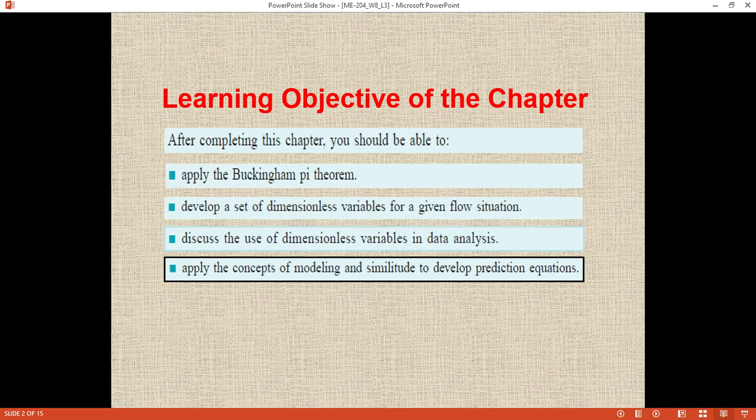This is the final lecture on dimension analysis. So let's see the learning objective that we have achieved so far. So now we are doing some practical problems to understand the concept of modeling and similitude to develop prediction equations. So far we have covered the learning objective up to this point, and let's move on to the topic we are going to cover today. So today we are just solving some practice problems. So let's start.

So here the problem is: glycerine at 20 degrees centigrade flows with a velocity of 4 meter per second through a 30 mm diameter tube. So here we are not talking about the material of the tube, we are just talking about the flow and the diameter. A model of this system is to be developed using standard air as the model fluid. The air velocity is to be 2 meter per second. So what tube diameter is required for the model if dynamic similarity is to be maintained between model and prototype? So here you can see what information is given.

First of all, we note down the data. So the temperature of the glycerine is given, the velocity of the fluid flow is given, and the diameter of the prototype is given. So these are the information about the prototype. Now to find out the flow, a model we have to develop using standard air. We do not have the glycerine available, so we are going to test the same phenomena with the air. The air velocity is 2 meter per second. So what tube diameter is required for the model if dynamic similarity is to be maintained? So we have to find out the model diameter to use air as a working fluid.

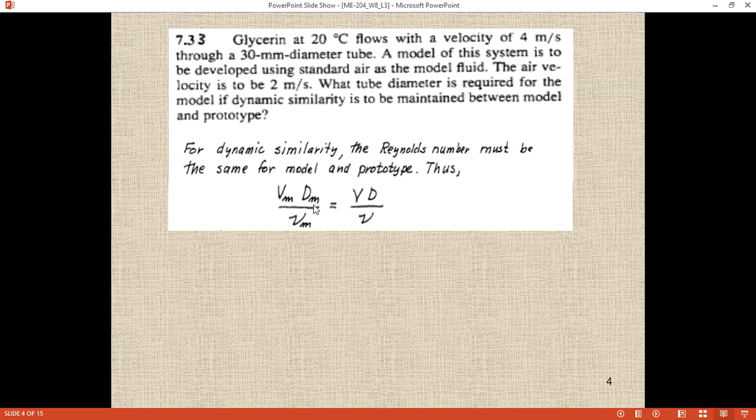So now we are going to relate what we have to find out. We have to find out the diameter of the model, what tube diameter is required for the model. So we have to separate dm. So we separated dm with all the variables. So here this is the viscosity ratio and here is the velocity ratio.

So the velocities are given and the viscosities we can find out from the table. We inserted the values and multiplied by the diameter of the prototype, which is given, d = 0.030. So finally we can calculate the diameter of the tube. That is going to be 0.736 mm. You can see that it's very small.

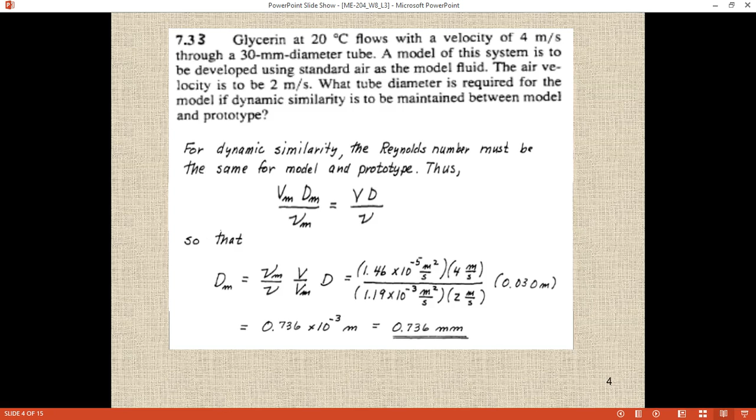So if we use this, because air is the fluid, it is almost less than 1 mm. So this is the solution of this problem. Let's move on to another practice problem.

Here a solid block in the shape of a cube rests partially submerged on the bottom of a river, as shown in the figure. This is the block, and this is the river, and we put this block in the path of the river, partially submerged. It is not completely submerged, it is partially submerged in the river water, and it rests at the bottom.

So the drag D on the block depends on the river depth. The drag force exerted by the river on the block depends on d, the block dimension H, the stream. The drag D on the block depends on the river depth. So the river depth is d.

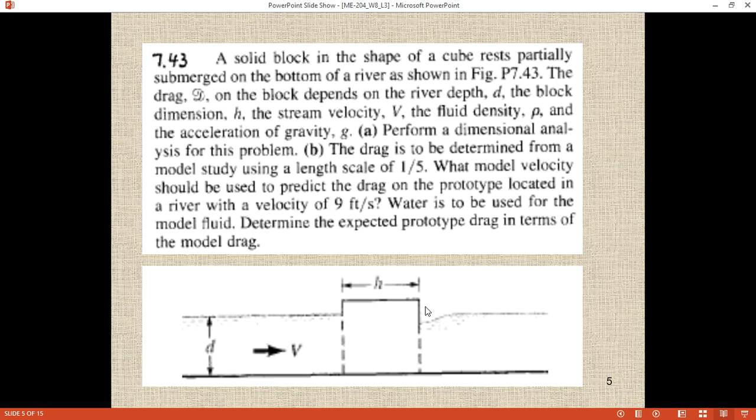The block dimension H: this is the block height H, block width H, and since it is the shape of a cube, it is H, H, H, so the height of this cube is also H. It depends on the river depth, the block dimension H, the stream velocity V, the fluid density rho, and the acceleration of gravity g, because the fluid has some height, so definitely it has some weight on it.

So what we have to do is perform a dimensional analysis for this problem. The first step, we have to determine the number of pi terms for this practical problem. Number 2, the drag is to be determined from a model study using a length scale of 1:5. So the length ratio is given: the ratio between the length of the model and the prototype is 1:5.

So what model velocity should be used to predict the drag on the prototype located in a river with a velocity of 9 feet per second? We have to determine the drag force on this block, on the prototype, and the river velocity is 9 feet per second in the real condition. The length ratio between the model and the prototype is 1:5.

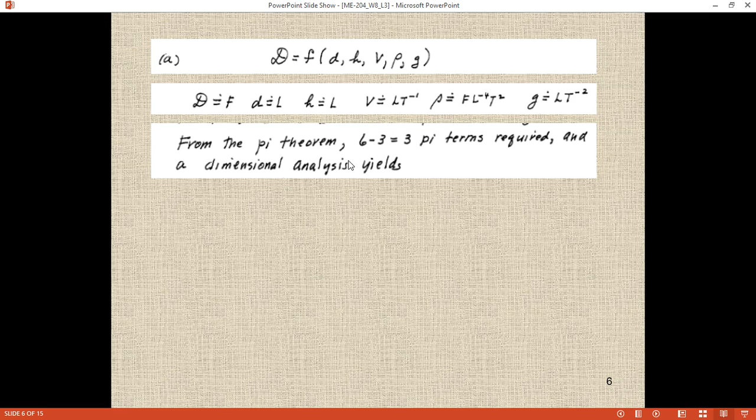From the pi theorem, the total number of variables gives, with 3 reference dimensions, 3 pi terms required, and the dimensional analysis yields this combination of variables, finally in the form of dimensionless numbers. These are the pi terms for the prototype. Now, to solve part B, we are going to write down the pi terms for the model.

So this is pi 1, pi 2 and pi 3. So pi 1 and pi 2, this term in the form of model dm over hm, so this is for the model and this is for the prototype, and same here, this is for the model and this is for the prototype, and same we can write for this as well. Okay, so here

since the ratio is given, okay, so what is the ratio? So the diameter of the model over the diameter, so we separate them. We took the diameter underneath and h is going up, so the ratio between the diameter of the model and the depth of the river fluid D, and height of the model block and height of the prototype, that ratio is given, that is 1:5. If the model size is 1, then the prototype size would be 5 times greater than the model.

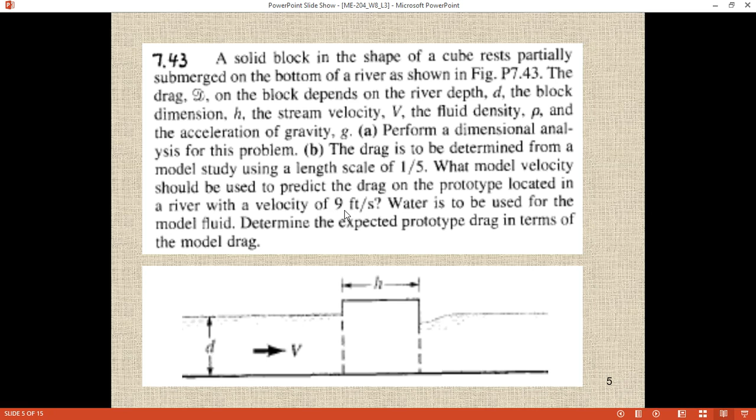We have to find out the model velocity to be used to predict drag on the prototype located in a river with this velocity. So here, this is the model velocity, we separate them. So this is the dimensional ratio and this is the acceleration ratio. We know this value and we know this value.

So normally we write the terms in the form of ratios, the dimension of model and dimension of prototype. So all the values are given. So finally the velocity of model is 4.02 feet per second instead of 9 feet per second.

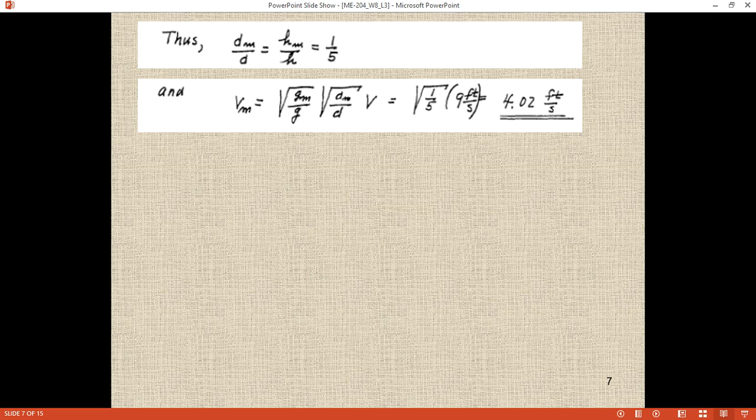Okay, so third, we have to predict the equation for the drag force on the prototype in terms of the drag force of model. Here you can see this is our third term. This is written for the prototype, now we are going to write it for the model. So this is the drag force that we have to determine in the form of dm. So we took all these values there.

So rho over rho m, density of the fluid in the river and density of the fluid used in the model, velocity of the river fluid, and the velocity of the fluid used in the model. Height of the block, the actual height of the prototype, and height of the model used in the laboratory. And this is the drag force on the model block. So we know the densities, we know all this.

So we inserted all those values, h over hm. Basically hm over h was 1 over 5, so h over hm is going to be the reverse, equal to 5 over 1. This we know is 9, this we have calculated 4.02. And since in both cases we are using water, the density of the water will be the same and they cancel each other.

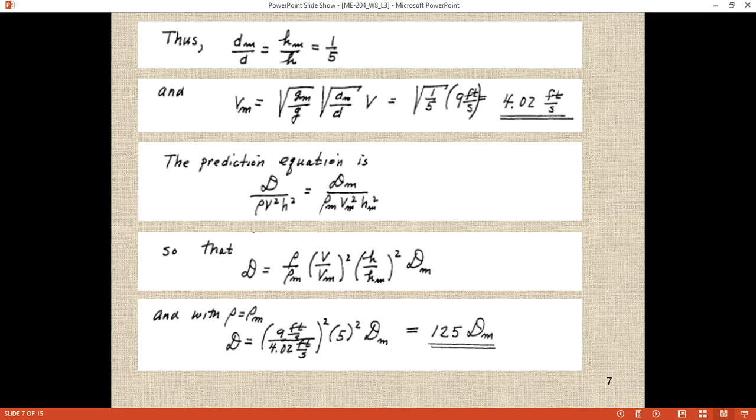So we will have the relationship: the drag of the prototype is 125 times the drag of the model. So this is the solution of this problem. So let's move on to another problem.

The pressure rise delta P across a centrifugal pump of a given shape can be expressed as a function of the diameter of the impeller, the angular velocity, the density of the fluid, and the flow through the pump. So delta P is a function of these four variables, where D is the impeller diameter, omega is the angular velocity of the impeller, rho the fluid density, and Q the volume rate of flow through the pump.

A model pump having a diameter of 8 inches is tested in the laboratory using water. When operated at an angular velocity of 40 pi radians per second, the model pressure rise as a function of Q is shown in the figure. When we tested the model with the impeller diameter of 8 inches at this velocity, we found the relation between the pressure drop and the flow shown in the graph.

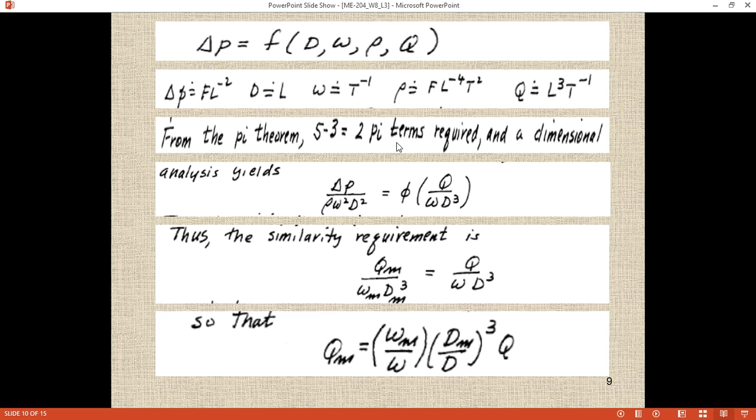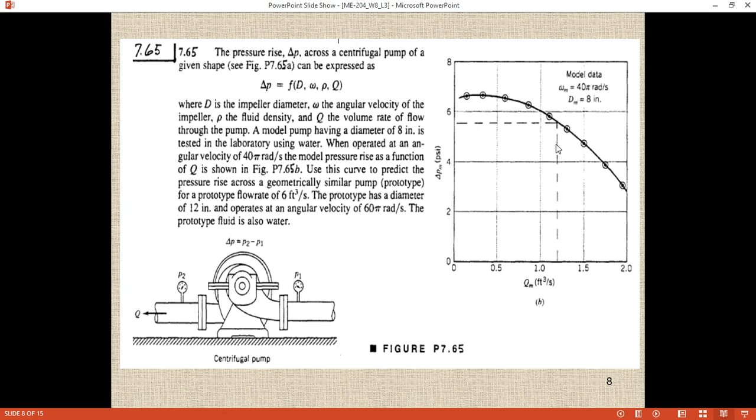We go straight, hit the curve, and finally we got the pressure drop across this flow rate, somewhere 5.5 something. This is exactly what is mentioned here, from the graph we got this value. So we write down the same pi term for the model as well as for the prototype, the first pi term, we separate all those values and make delta P of the prototype a function of delta P of the model. This is the ratio of angular velocity, this is the ratio of the diameter.

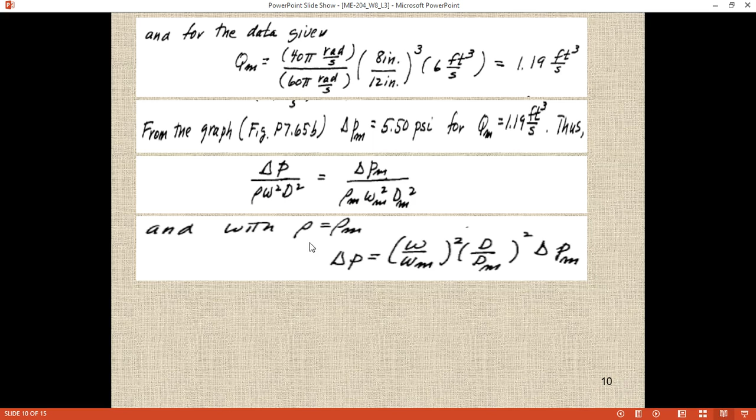If the density is not the same, if we are using some other model fluid, we can take the ratio of the density as well. Since the density of the water model and the density of the prototype fluid are the same, we cancel them, and finally this is the relationship, and we calculate the values by putting in all the given data. Finally the delta P we got is 27.8 psi. This is the pressure drop across the prototype pump. In the model pump the pressure drop is very less, but in the actual one the pressure drop is much higher.

So let's move on to the last problem of today. A wind blows past a building. Complex flow patterns can develop due to various factors such as flow separation and interaction between adjacent buildings. We have already discussed flow separation. When the streamlines are flowing in a laminar way, if the flow becomes turbulent, the streamlines get separated and the distance between the two streamlines starts increasing. In that case flow separation starts between the streamlines.

Assume that the local gauge pressure P at a particular location on a building is a function of the air density, the wind speed, some characteristic length L and other pertinent lengths Li. The gauge pressure measured at a point on the building depends on these. Characteristic length means the length of the building, and other lengths, like width or some other dimension, are indicated with Li, needed to characterize the geometry of the building or building complex.

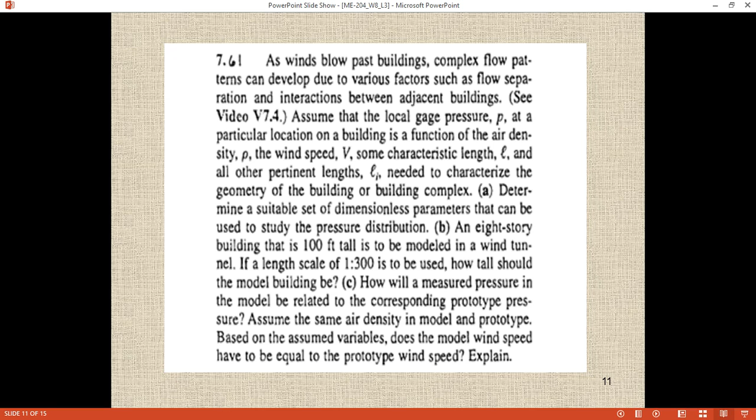First, we have to determine the pi terms. Second, we have to find out the height of the model or size of the model. And C, we have to determine a relationship between the pressure on the prototype and the pressure on the model. So the first step is to write down all the variables in the form of dependent variables. The pressure drop on the building is depending on the following variables.

We wrote them in the form of the dimensions, and finally we have 5 variables and 3 fundamental or reference variables. So we need two pi terms to explain this phenomena. After solving that, we got these 2 pi terms. This is the pi term for the prototype or for the real object. So first problem we have solved, we have developed the pi terms, and second we have to determine the height of the model.

So for the geometric similarity, we took this pi 2 and wrote down pi 2 in the form of the model, and this is the prototype. The ratio is given 1:300. So Lm over L. This is the model height, and this is the prototype height, and this is the characteristic length of the model, and this is the characteristic length of the prototype. It follows that all pertinent lengths are scaled with the length scale Lm over L. Thus, Lm over L is equal to 1:300.

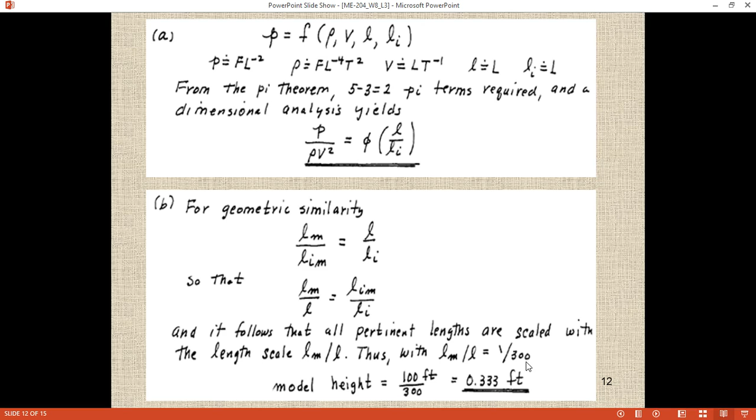So the model height. The height of the actual building is 100 feet, and the scale is 1:300. So the model height would be 0.33 feet, and whatever the other lengths are, they will be reduced accordingly with the 1:300 scale. Okay, so now we are going to the third part.

We are going to develop a relationship between the pressure drop on the building as a function of the pressure drop on the model. With the geometric similarity satisfied, it follows that. Here we separate this term because we have to find out the pressure drop at a point on the prototype. So that is P as a function of density over density of the model, velocity of the prototype over velocity of the model. Since the density of the air is the same, we cancel this term.

So finally P, the pressure drop on the building, is a function of the pressure on the model multiplied by the velocity ratio squared. This is the relationship between the prototype and the model pressure drop. So with the given set of variables, the model wind speed does not have to be equal to the prototype, because it has a multiplication with the ratio of the pressure drop. If the pressure drop varies, the velocity on the model and the velocity on the prototype would not be the same. It would be different.

So here are the solutions of all the problems we did. This is the end of the dimensional analysis chapter.